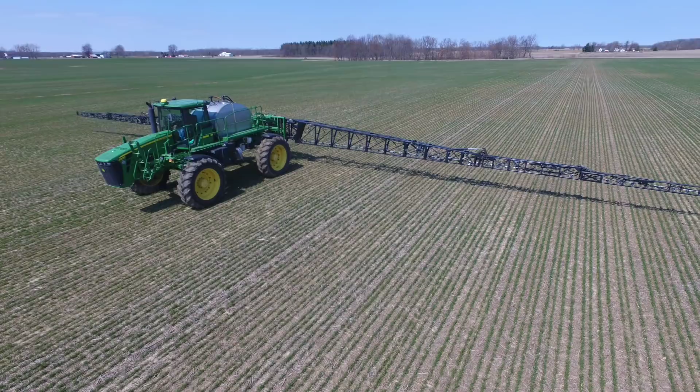For now, though, we are going to go and get that 4440 because it's plugged in. It should start, we'll be fine. We're going to get them hydraulic couplers swapped out and be done with that project, too.

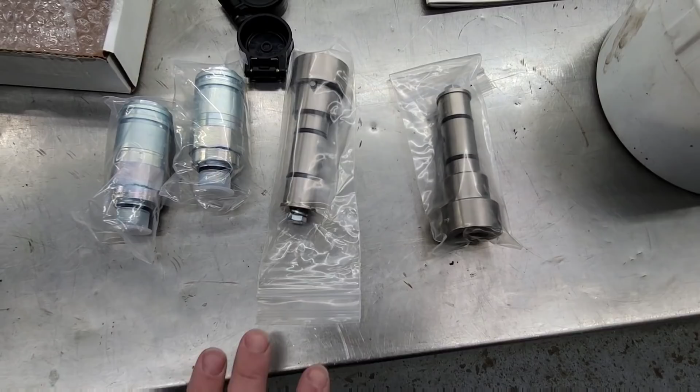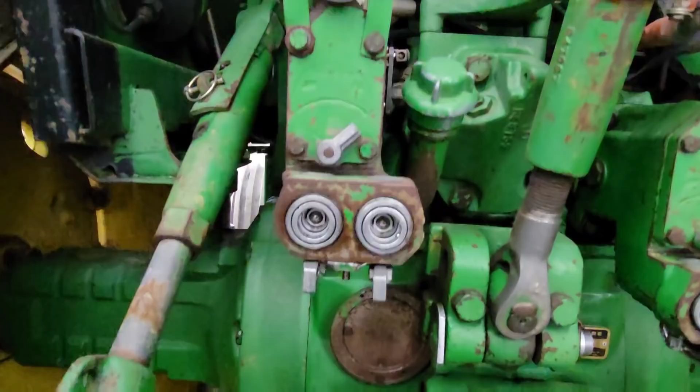Here is what we're going to install, and I'll show you the process here as we go. I watched a video on this, so I have somewhat of an idea what I'm doing, but we've got the instructions here. Basically, we've got to take out the couplers that are in here, and they're the conversion kit to make it Pioneer couplers or ISO couplers instead of the old John Deere style, but they leak, and fortunately it's fairly cleaned up from when I had it in the shop a week or 2 ago.

We're going to do, I better make sure, I think this is outlet number 1. I better make sure because I want to do the one that we're going to use the most. And we're going to take this old stuff out. We've got to pop these caps off and then pull the pins out, and then they slide out, and we'll clean stuff up a little bit and get the new ones in.

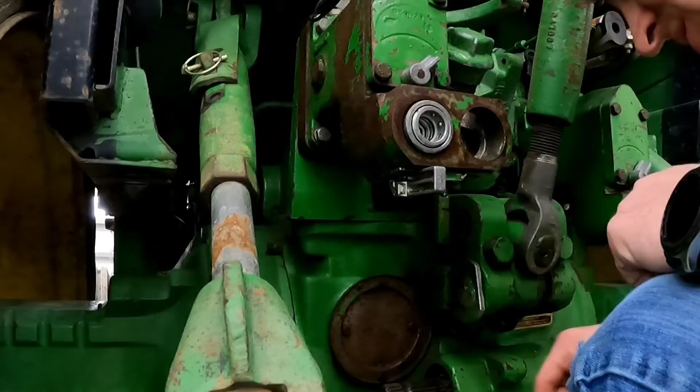Okay, so I got one of these out. The hardest part here is getting the snap ring out. So I'm going to attempt to get this one out. You guys can watch me struggle for a minute, probably in time lapse or sped up, because this is going to take a while. At least the last one did. Where's the end? Oh, right there.

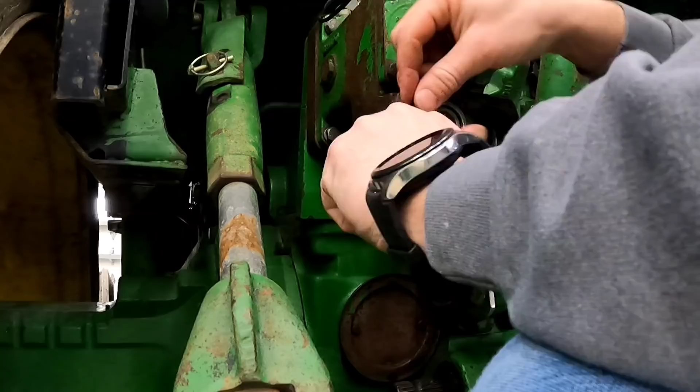Once we get that off, then we've got to, you can either pull the cap off the top here. Oh, I might have to take this off. Well, we're going to punch the roll pin out of the handle on the bottom is what we're going to start with.

Okay, now we should be able to tap this up. Pop that cap off. Don't think that's going to go up, so we're going to have to go down, which means this clip's got to come off.

Okay. Don't know what happened to that clip. Oh, there it is. There.

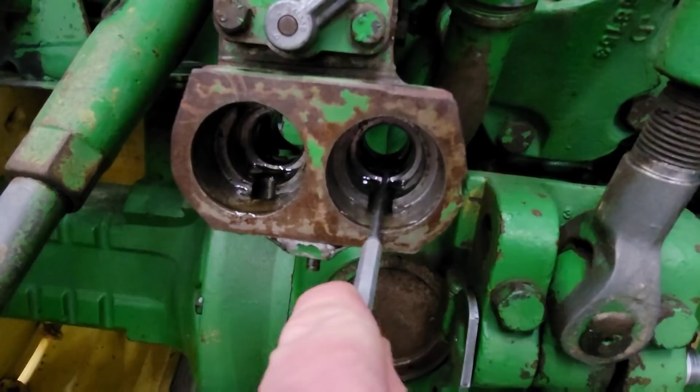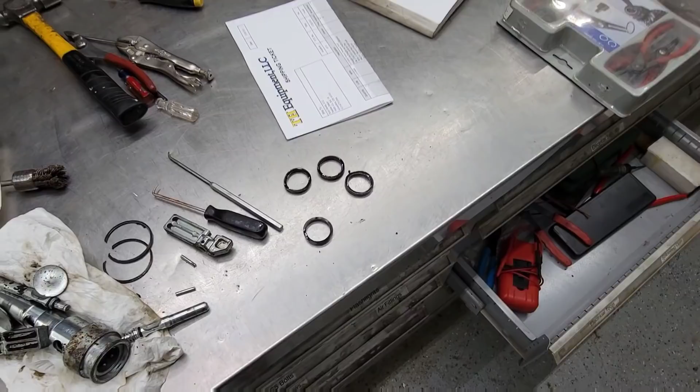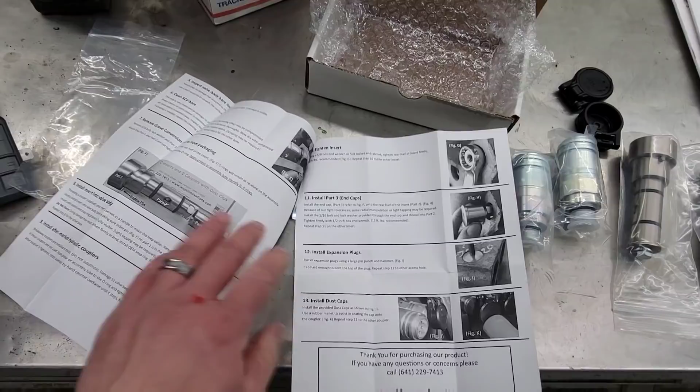The next step is to get in there and get the O-rings out. They are 2 right there and 2 back there. Got the O-rings out, there's all the old pieces, so we'll come back over here. I'm pretty sure we're ready for new stuff. I cleaned up the housing there a little bit with some brake cleaner.

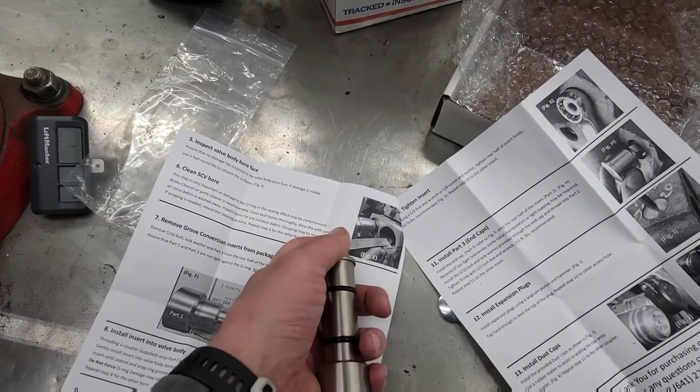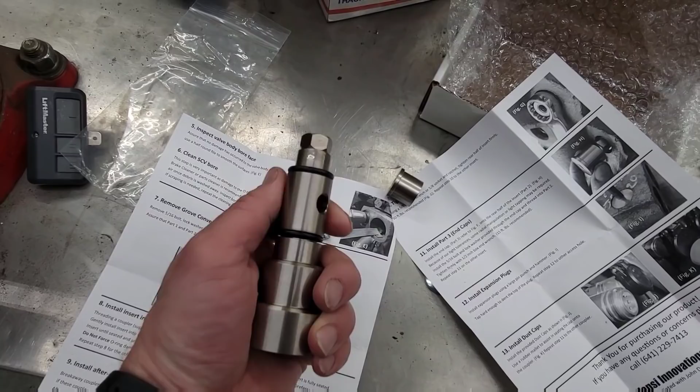So what's next? So this is kind of the, I don't know, what do they call this, the insert or whatever part it is that goes in the bore where we took those other ones out of. And then we're going to screw the coupler into this, and it won't slide, it'll stay in there. So we've got to take this piece off the back, the bolt, and that piece, and then it actually screws in the center here. They say to leave that loose and then lubricate up these O-rings really good before we insert this into the bore, the valve body. So I'm going to find some grease or something to put on those, and then we'll be on to step 8.

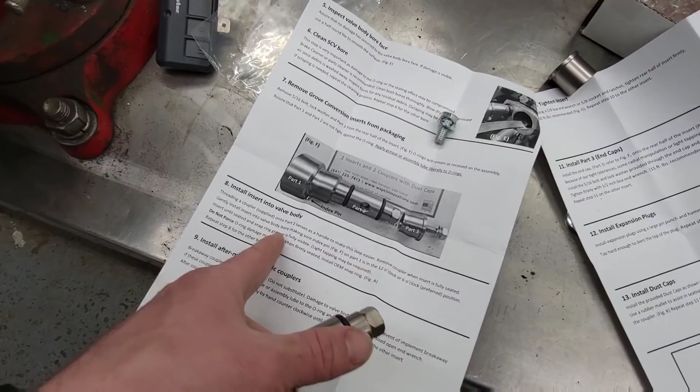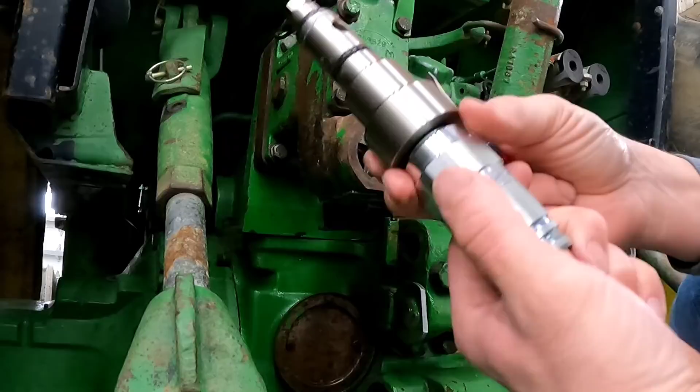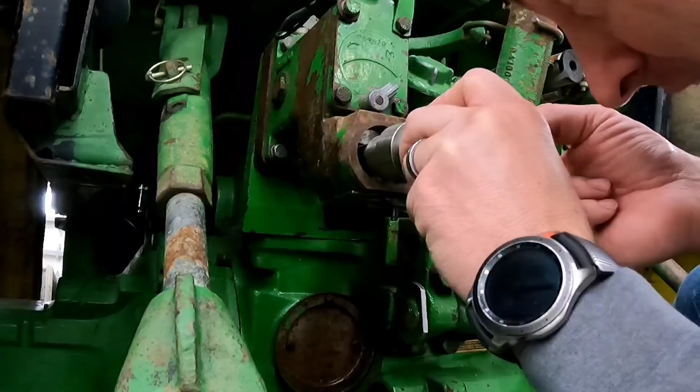Okay, so I've got this, I've got some lubricant on the O-rings. It says to put one of the couplers on. It says to put one of the couplers on to use it as a handle. There is a pin here that's kind of to index it. We want that to be straight down. So we're going to put it in like this. And I assume this is going to be pretty tight. So we're going to just gently and try not to force it. Okay.

Okay. Got it. All right, so then we're going to take this out and put our snap ring back in.

Okay, now we do the other side. After we've got both of those in and the snap rings in, it's time to install our couplers. Again, lubricating the O-ring, and we're going to spin this in.

It says to tighten it with an appropriately sized wrench, and that's a big one. I don't have an appropriately sized wrench, so we use the adjustable. I don't know how tight, it didn't say. We'll call that good. Then it says to rotate it counterclockwise until it stops right there. Basically that index pin is contacting there. So do the other one again.

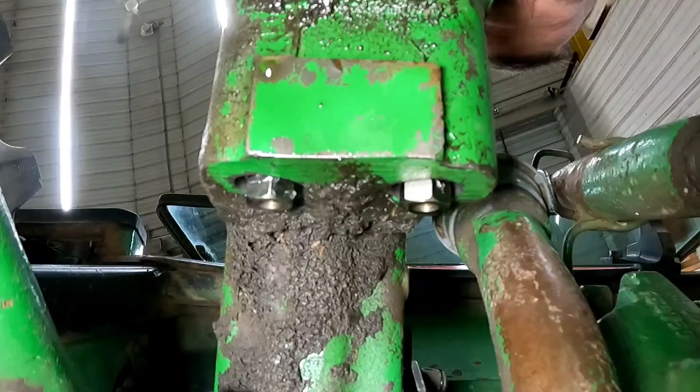Okay, I've moved you, so now you're on the back of the tractor looking up at the rear of those blocks right there. There's a nut on there. We need to tighten those up.

It says it's a 5/8. I'm going the right way, right? Can't really tell. I'm pretty sure. It's backwards. I was not going the right way. Whoops.

Okay, this one said 50 foot-pounds. About that much.

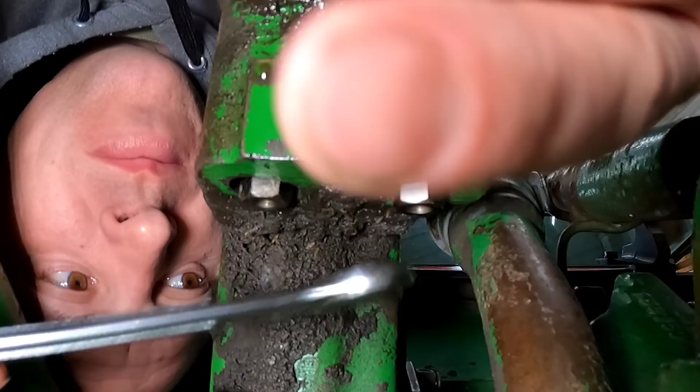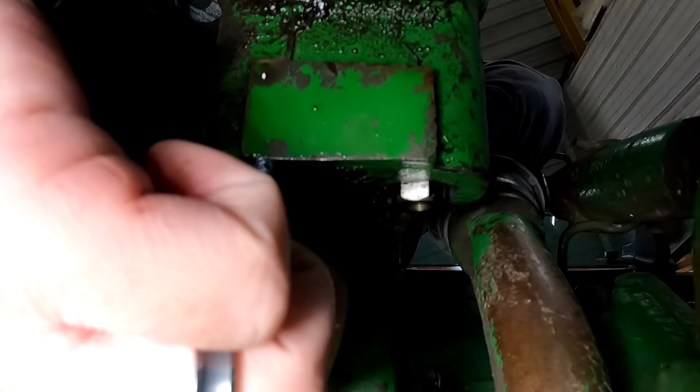Okay, once those are tight, then it comes with this little cap with a bolt through it, and we got to put that on the end. Well, the directions said that was going to be hard. It was not. Okay, and that one is a 1/2 inch, and it says tighten firmly, which it also said with that last nut we had to tighten, except for this one says 15 foot-pounds.

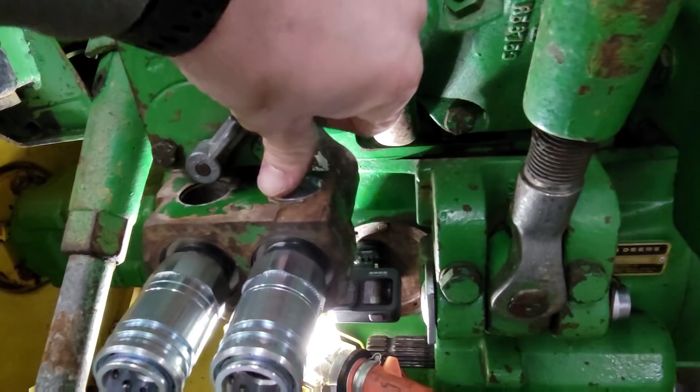Okay, I got both of those on. Next step is to put new dust caps in, or expansion plugs, or whatever they call these. Yeah, these are the expansion plugs. So they fit down in the hole there, and then we just hit them with a hammer and a punch to flatten them out and expand them so that they stick in the hole.

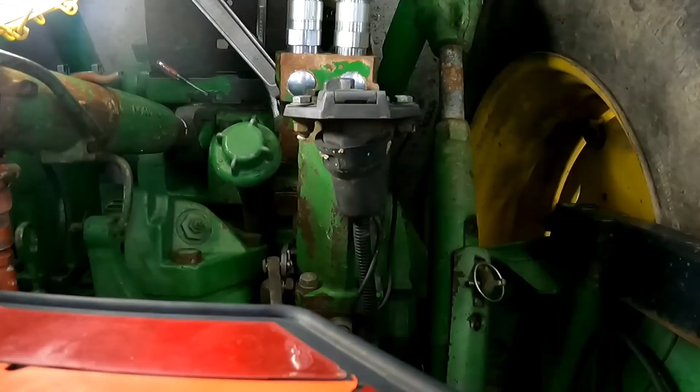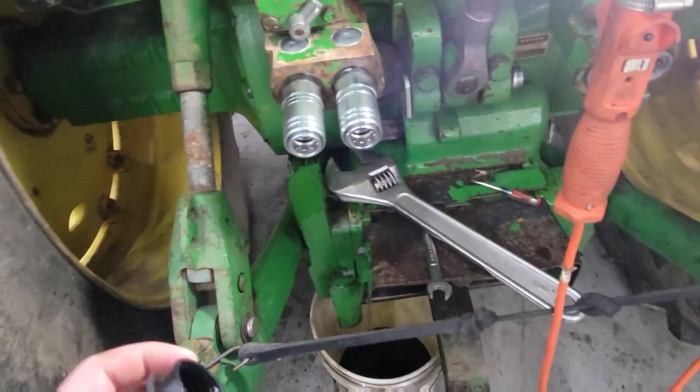I might need a bigger hammer and a bigger punch for that matter. And then the last step is the dust cap. Ouch.

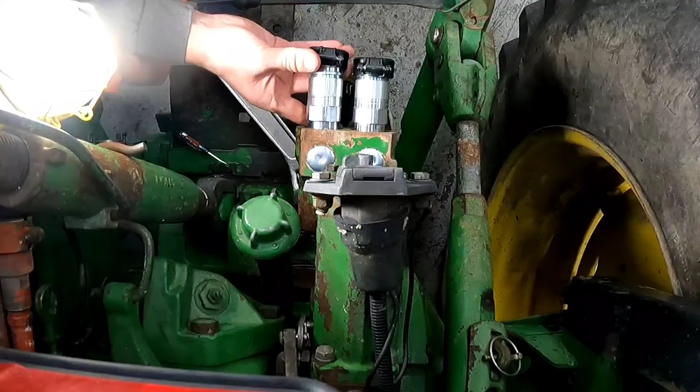There you go. You had them that much? Had it far out? It replaces the inside. Is that all one piece all the way back? No, there's an insert that goes in there that doesn't move. So it's got O-rings built into it, and it doesn't slide past them like the original. What moves? You push it in. It's just like the other tractors. So you replace these guts. Yes, I replaced the whole thing, but it screws. This piece screws in on the end there, and that'll work. They stick out a little bit, but they're a better design, quality valve, or a newer style valve.

So we're gonna do this one and leave that one for now. We're gonna do that one and make sure we like it and stuff. If we still have trouble with that one leaking... we only use one a lot of the time, so I just did the one. Well, what do we use it on? We use it on the dump trailer and the mower. Yeah, the mower would use 3 hoses.

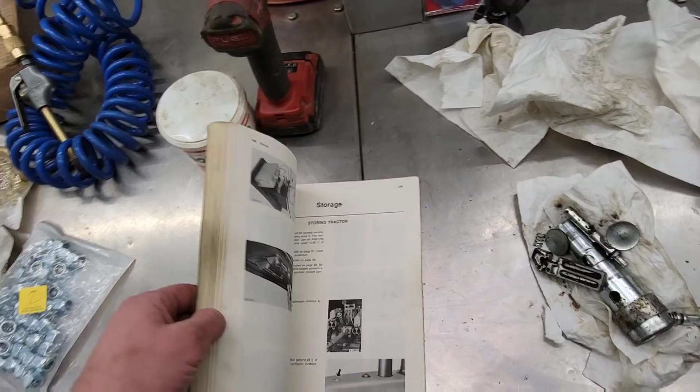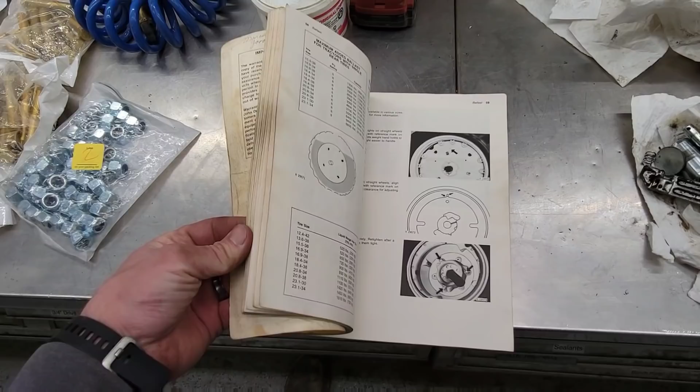I got the book out so I could write down that I changed those couplers in it. Look what I found. Page 1. March 24th, 1978, Good Friday. How about that? My grandpa got this tractor on Good Friday. This one doesn't quite have the same fun illustrations that the 4020 book does, but still, pretty cool to look at these old manuals.

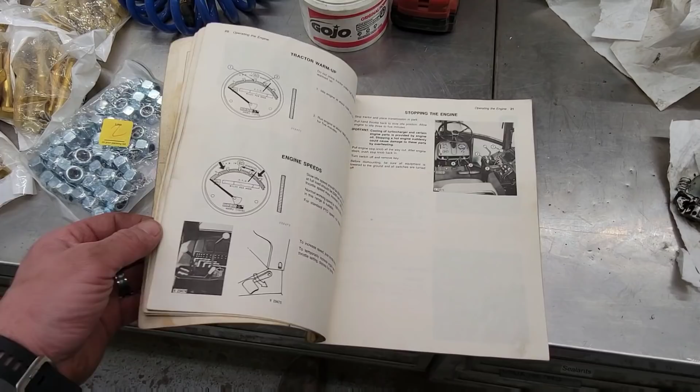Okay, this tractor is done now. Again, we can get it back out of here, put it back where we just got it from. It's lunchtime, so I'm going to go get something to eat, and it's not looking promising on our bushings coming for that field cultivator today, so we'll figure something else out to do this afternoon, I guess.

Okay guys, well since I didn't get those bushings for that field cultivator, we're going to do some computer work this afternoon. I've been working on this, and I want to show you guys exactly how I'm making my prescription maps for seeding, for starter, and for nitrogen. So we're going to do a field or two where we do all 3 of them. It's a different process for me this year than I've done in the past.

We use John Deere's software and products, right? The Green Star receivers, the 2630s, Green Star rate controllers, that's what we use. And so I've always used Apex, which is John Deere's desktop software in the past, and it's always treated me pretty well. But John Deere has moved away from that, they're not really supporting that product anymore. Everything is done through the My John Deere Operations Center, which is really good. It's easier because I can pull it up on my phone, I can see my maps from anywhere. I really like that software or program or whatever you want to call it.

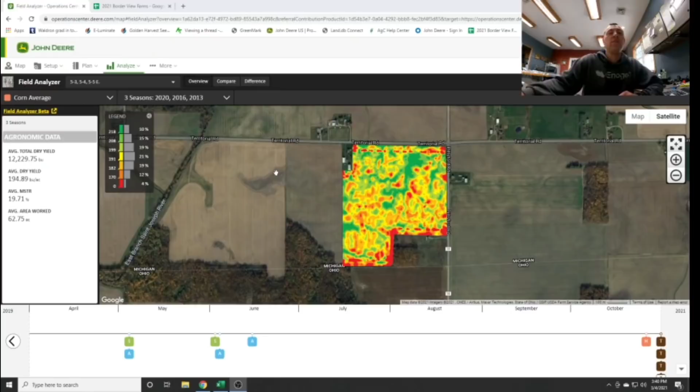Okay, so here is, we're going to pull up a different field. Let's just get out of this one. Okay, so this is our operations center, these are all of our different fields and stuff here. I just created the maps for this field, now we are going to do the one right next to it. This field was corn last year, it will be corn again this year. It's only these two, but we're going corn on corn.

So what I want to do, actually not even right here, I want to go up here to the plan button and hit Agrian Prescription Creator. That's going to take us to another website. They're all tied together here, but then we select our organization, we select our client, Border View Farms. We're going to find that field, that's a Bernath farm. We then go to the field, so this one is 5-6, it is west of the house there. And the field boundary automatically loads to the active boundary, that one happened to be created in 2018. So then we go down here to the bottom and it says prescription source.

We click on that, we want an average yield. You can also do free forms where you draw them in by hand. You can do field operations if you wanted to do just 1 year's yield data, I think is in there, or a spraying map or something, I don't know why you would do that. Or it does have the option for a soil survey where you can make it based on soil types. A lot of people make their prescription maps based on the soil types and the soil maps. I don't care for that because while soil types and yield are generally correlated, the soil maps are not nearly accurate enough for this, and I care more about the yield potential than I do about the soil type. And there's more things that affect yield potential than just soil.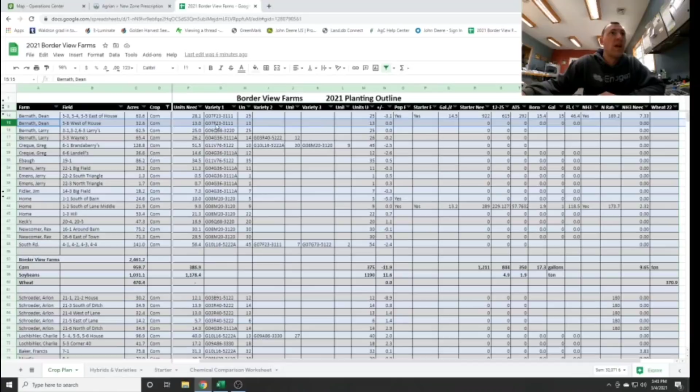So while we're waiting for that, I'm going to click up here. This takes me to my plan, and you can see this is the field that we are working on, so I need to know what hybrid we're going to put in there. It is G07F23.

Okay, so here's back to the prescription creator. This is the auto-populated zones. Now, I could just use those, but I feel like the program is just making zones to make it look pretty, right? Because look at the breakdown down here on the bottom: 188 to 197, 197 to 204, 204 to 209, 209 to 226 - those don't mean anything to me other than that they have roughly the same number of acres in each zone. Well, that's not how we're going to do this.

So since I know that our top is above 210, we are going to have 5 zones in this field. Our bottom one we're going to set way down here at 120, and then we're going to go to 150, 180, and 210. Then we're going to hit the update map button.

So these are my yield zones that I create everything for, and they're a little bit arbitrary by me, but the idea was to have the average kind of be in the middle. Now I may need to adjust them higher at some point, but that between 150 and 180 is pretty historically where we're going to average. And the last few years have been a little bit better, and maybe that's why my maps tend to be towards the higher end of this, but we're going to leave them there for right now.

So now you can see our zones up here on this map have updated. It's not as pretty of a map, but it's a more accurate map for my purposes. We have very little down here in this corner that's in the red under 120 zone. We've got a few more spots - no, we don't, we just have this next strip here that's in the 120 to 150, and then we've got a little bit in the yellow zones here, corners. But the vast majority of the field is in this 180 to 210 range, right? Okay, and then we've got some areas that are historically better. So those are the zones that we want.

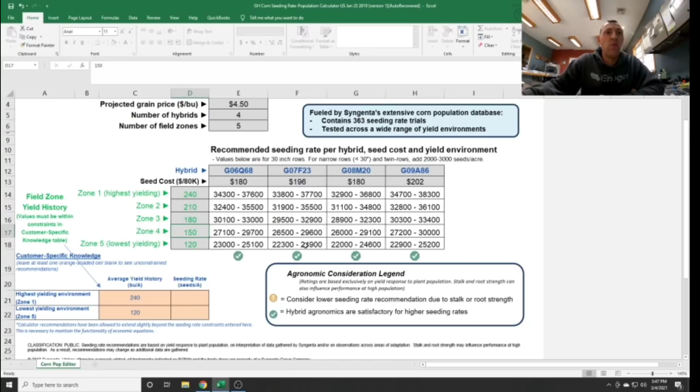All right, so I look at this 07F23 column, and we're going to take these numbers directly and correlate them, put them into right here. I got this printed off so it's easier for me to not flip back and forth. But our low end was 24,900, then we go to 29,600.

And remember, that 24,900 may seem really low, but it's on 0.138 acres - it's just this little tiny nub back here in the corner. Likewise with the 29.6, it's just this little band right here. We're not planting very many acres at that rate.

So then here we get into just a little bit more - it's going to be 32,900, but here's the bulk of it, 24 acres of the field will be planted at 34,800, which is sort of high actually, but this hybrid likes higher populations. It can handle them.

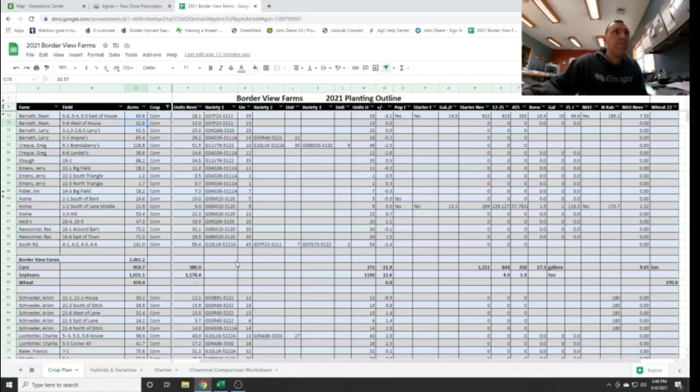Back on this spreadsheet, we are right here - 32.6. That gives me my average planting rate, which I can put in right here. It is 35,175. And then that will update the number of units that I need to plant the field, so it ups it a little bit because I put 32,000 in as the base, the default on everything essentially, and then we modify from there. So that gives us our population prescription.

So in this column, I'm going to write yes, I have a population prescription. Now we're going to go back, and down here we're going to click Add a Tank Mix - corn starter. So now we're going to make the prescription map for our corn starter.

We're using the exact same zones, so when the planter changes the seeding rate, it's also going to change the fertilizer rate. And how do I come up with these values? Well, that goes back to this spreadsheet and my starter stuff.

You guys remember I was working on this a while ago when we were trying to order chemicals and stuff back in January, trying to figure out what I wanted to use for starter blend. And this is what I came up with, what's in this box. It's going to be, we're getting this pre-blended product that's 10-34-0 and ATS.

It's going to come out at about 10.5, 32-0, 2% sulfur. I'm going to add some more ATS to that. Basically, the blend that I've got set is for 12.5 gallons per acre, our mid rate, and it's 7.5 gallons of the starter, the 10-34-0 blend, 4.5 of ATS, which is ammonium thiosulfate, 12% nitrogen, 26% sulfur, a quart of zinc, and a quart of boron.

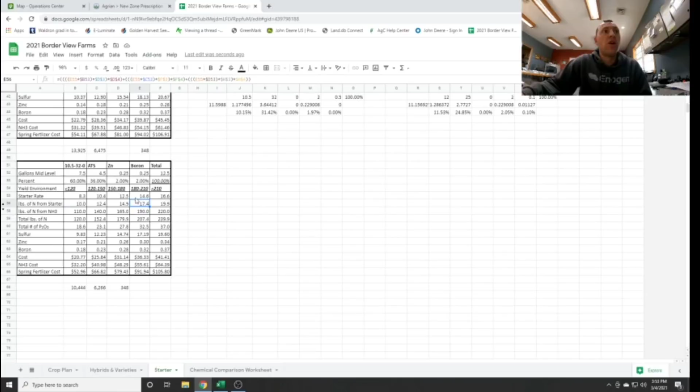So I want 120 pounds in my low end. Well, I'm getting 10 pounds right here from the starter, so I need 110 from the anhydrous. Likewise, in the zone where we're doing most of the stuff, 210 is the top end of the zone, so I want to put about 210 pounds of nitrogen on total. We're getting 17 from the starter because we're putting a higher rate of starter on, so I'm going to do 190, which gets me up to 207. That's pretty darn close, right?

And then, yeah, so we take those numbers, we go back over here. Again, I've got them printed off over here. It is 110, 140, 165, 190, and 220.

Okay, so that means we're going to have 6,323 pounds of nitrogen in our anhydrous divided by 32.6. It's 193 pounds per acre average.

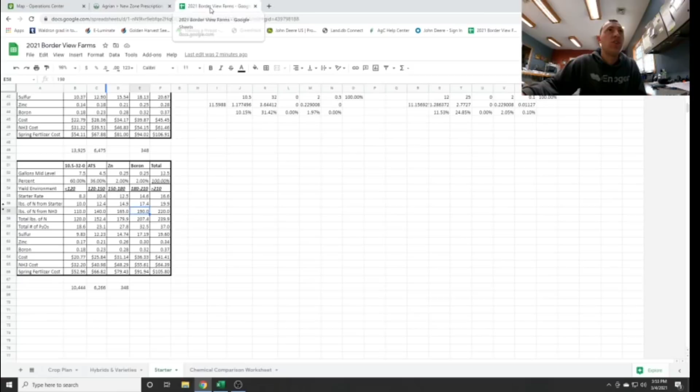So we come back to the crop plan over here. We type in 193, we're going to call that 194. Now this spreadsheet will calculate out how many tons that is per field, so it'll be 3.85 tons of anhydrous.

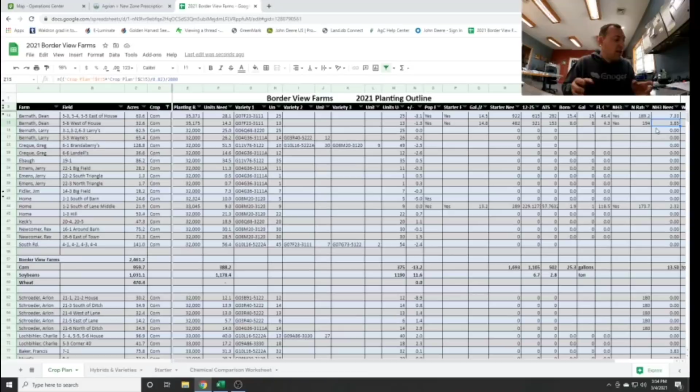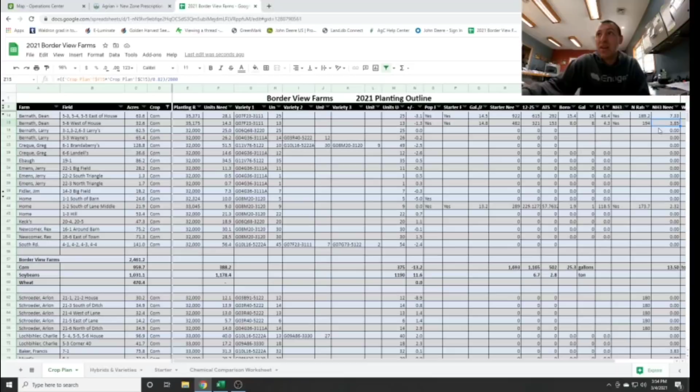So the nitrogen number, the 110, 220, those are actual pounds of N. Anhydrous is 82% nitrogen, so this formula does the calculation to figure out how many tons of actual product that is. So basically it tells me about how many anhydrous tanks I'm going to need, 2 tanks to do that field, more or less.

Okay, so we go back over here, and now we've got our nitrogen, our starter, and our seeding rates all in there, and we're going to hit save.

And once this saves, it's going to ask if you want to do another one or you want to close. I'm just going to hit close for right now, because then it takes me to this screen, and you can see the files that we just created. 5-6, there's the 3. These will get automatically uploaded to the display in the tractor, where the planter is, and then we can use them once we get to the field.